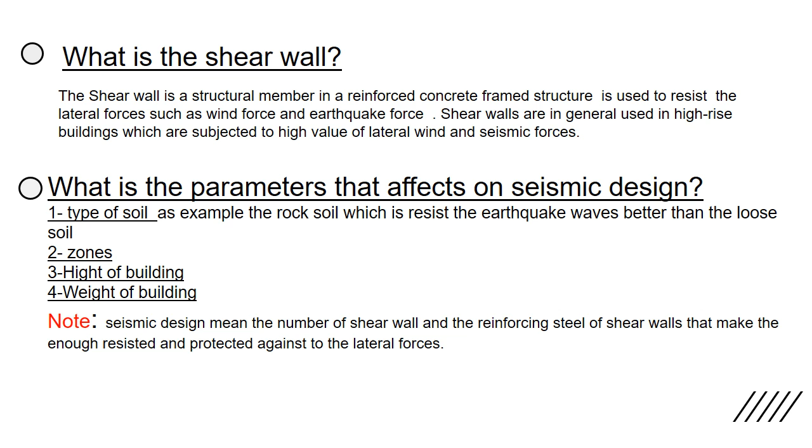The parameters are: 1. Type of soil. 2. Zones. 3. Height of building. 4. Weight of building. Now we want to know what are the steps to design the shear walls.

1. Find the weight of each floor. 2. Find the center of mass and center of rigidity. 3. Find the eccentricity in the x direction and y direction, and the total eccentricity in the x direction and the total eccentricity in the y direction.

4. Calculate the base shear. 5. Calculate the floor forces. 6. Calculate the torsional rigidity. 7. Select the first shear wall that we want to design.

8. Draw the moment and shear diagram for wall forces at the selected wall. 9. Find the temporary area of the selected design wall. 10. Design the boundary element of the selected shear wall. 11. Design the steel of the selected shear wall.

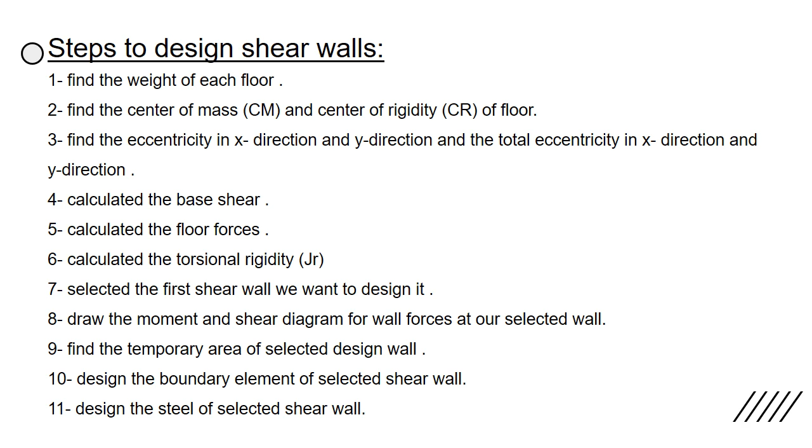Now we want to know how to design the shear walls. In this video I explain how to design the shear wall through a full example. This example contains a building.

This building with 7 floors has 3 shear walls in the y direction and 4 walls in the x direction. I have gamma of concrete equal to 24, dead weight equal to 14, and F prime C equal to 30 megapascal.

I have the 3 shear walls in the y direction shown in blue color and the 4 walls in the x direction shown in green color. I find the distance between the center of each wall and the y-axis, and the center of each wall and the x-axis.

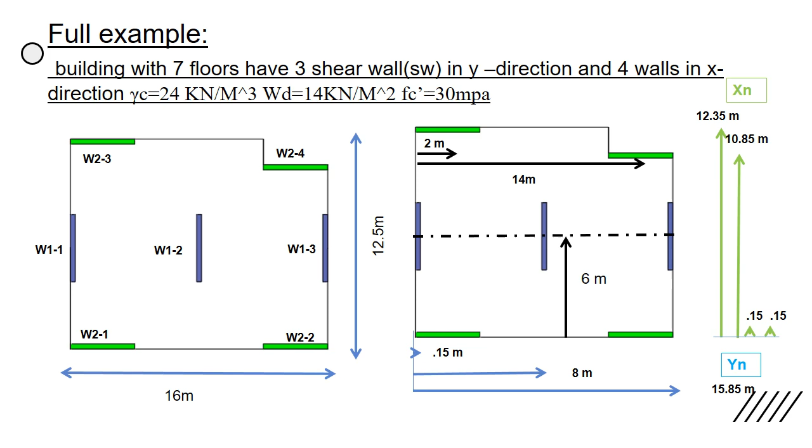Firstly, we will go to step number 1 to find the weight of each floor. In any building there are many elements. To find the weight of each element in this building, such as shear walls, slabs, and columns.

In our example, I have shear walls and slabs. So I will find the weight of shear walls, which equals 7 (the number of shear walls) multiplied by 4 (the height of the shear wall), multiplied by the length of the shear wall which equals 4, multiplied by 0.3 (the thickness of the shear wall), multiplied by the gamma of concrete.

This equals 806.4 kilonewtons. Then we're going to find the weight of our slab. The weight of the slab equals the area of the slab.

In many cases or questions we exclude the opening area, such as the stairwell and skylight. Then we multiply the net area by the dead load of the slab.

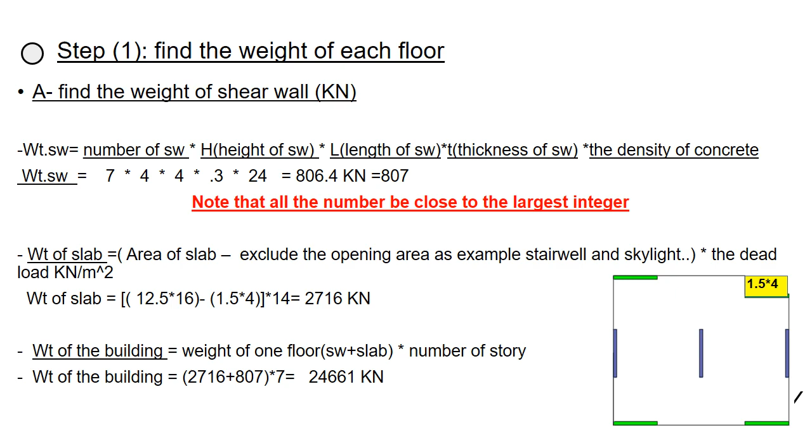Step 2 is to find the center of mass and center of rigidity. This step is very important because the earthquake forces act on the center of mass, then the building rotates around the center of rigidity. So we must be careful when calculating the center of mass coordinates and the center of rigidity coordinates.

To find the center of mass, we use a table. As you see, in each cell we include first the area, then the weight of this area, then we find the center, the distance between the center of this area and the y coordinate.

Then we take the distance from the center of this area to the x coordinate. Then we multiply the weight of this area by xi, and then we multiply the weight of this area by yi.

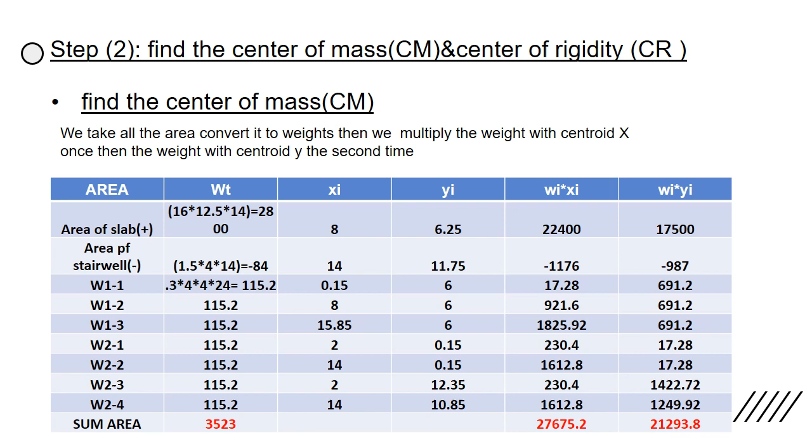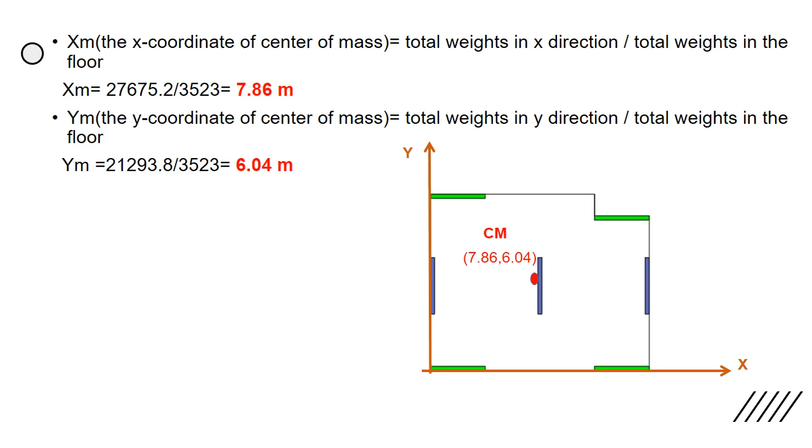We then collect the value wi multiplied by xi, and collect the value in the column wi multiplied by y. Now we find xm, the x coordinate of center of mass, which equals total weight in x direction over total weight of the floor, equal to 7.86. Then we find ym, the y coordinate of center of mass, which equals total weight in y direction over total weight of the floor, equal to 6.04 meter.

Now we want to find the center of rigidity. First we calculate the stiffness of the shear wall by the equation Ke equal 3EI over h cubed, and we explain each symbol in this equation. In the end we find the stiffness of the shear wall, which equals 1103.3. After calculating the stiffness of one wall, which is the same value as the others, we want to find the rigidity coordinate.

We divide the shear walls into two groups. First the x direction walls, which equal W21, W22, W23, W24. We find the stiffness of these shear walls and find yi, which is the distance between the center of the shear walls in the x direction to the x axis, and then multiply stiffness by yi.

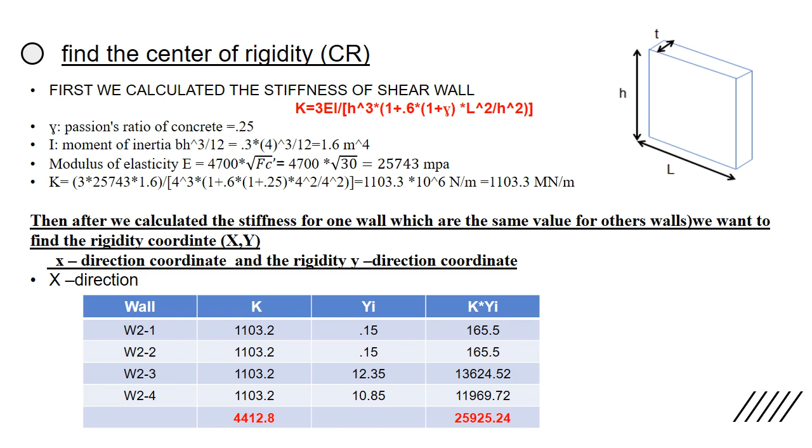We collect the stiffness of all walls, and collect the value in the column k multiplied by y. Now we switch to the other group, which is the shear walls in the y direction.

In the end we find the x coordinate of center of rigidity, equal total k multiplied by xi over total stiffness, equal 8 meter, and the y coordinate of center of rigidity equal total k multiplied by yi over total stiffness, equal 5.88.

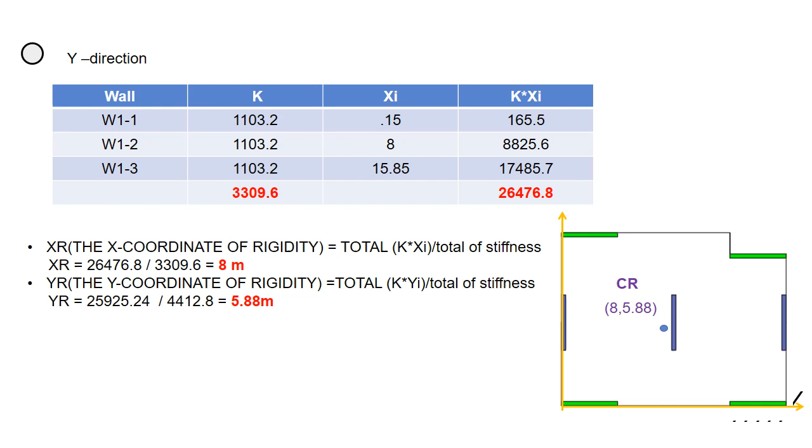Now we go to step 3 to find the eccentricity Ex, Ey, Ex total and Ey total. First, Ex means the difference between the center of mass and center of rigidity in the x direction, and Ey is the difference between them in the y direction. Ex total equals Ex plus or minus 0.05 multiplied by the length in the x direction of the floor.

This term is the minimum eccentricity, so we call it the additional value to Ex. If Ex is negative, then this term 0.05 multiplied by Lx must be negative, because we want the additional value to be the minimum eccentricity.

Ey total equals Ey plus or minus 0.05 multiplied by the length in y direction of the floor. The same case, 0.05 multiplied by Ly is the minimum eccentricity and is the additional value to Ey, so it must have the same sign as the Ey value.

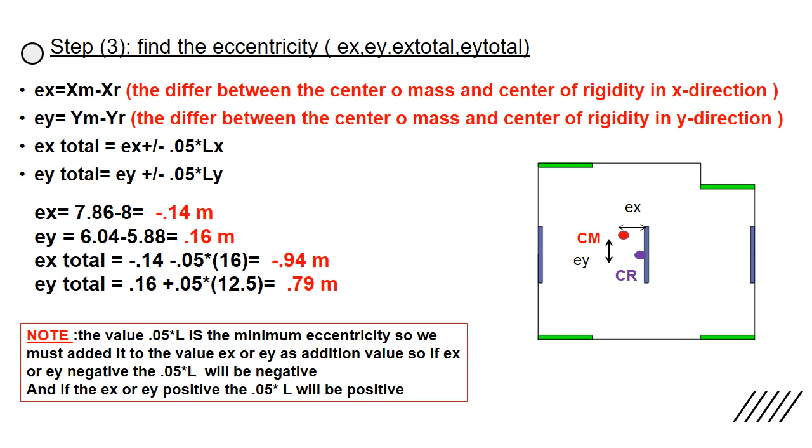Now we calculate Ex equal negative 0.14 meter, Ey equal 0.16 meter, Ex total equal negative 0.94 meter, Ey total equal 0.79 meter. Step 4, calculate the base shear.

First we select the criteria needed to calculate the base shear. We have V max and V minimum, each with a specific equation. If V is larger than V max, then we take V max as the control value. If V is less than V minimum, then we take V minimum as the control value.

I is an important factor. If we have a hospital or school, this is an essential building, and I must save it from collapse through earthquakes, so we make this factor higher, taking it equal to 1.25. But in our example we have a usual building, so we take it equal to 1.

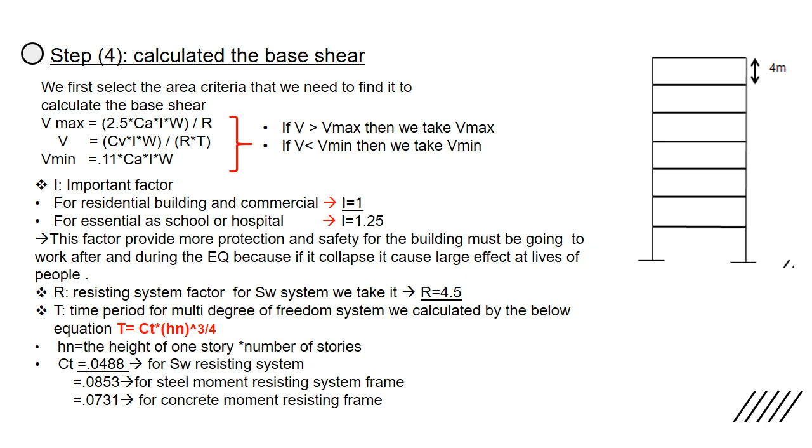We have R, called the resisting system factor. In this example we have a shear wall system, so we take it equal 4.5. Then we have T, called the time period of the multi-degree of freedom system, which we calculate by the red equation, and we explain each symbol in this equation to find the time period.

In the Vmax and Vminimum equations, we have Ca, the acceleration coefficient, and Cv, the velocity coefficient. These coefficients are extracted from tables depending on the type of soil and the zone factor.

These tables are in the codes. For example, if we have this building located in Amman, Jordan, with rock soil, and this area is in zone 2A, we go to table 16I and select zone 2A, then find the zone factor, which is 0.15.

Then we go to table 1 to find the value of CA and CV. We have the zone factor, and the type of soil, which is rock soil, and we find that CA equal 0.15 and CV equal 0.15.

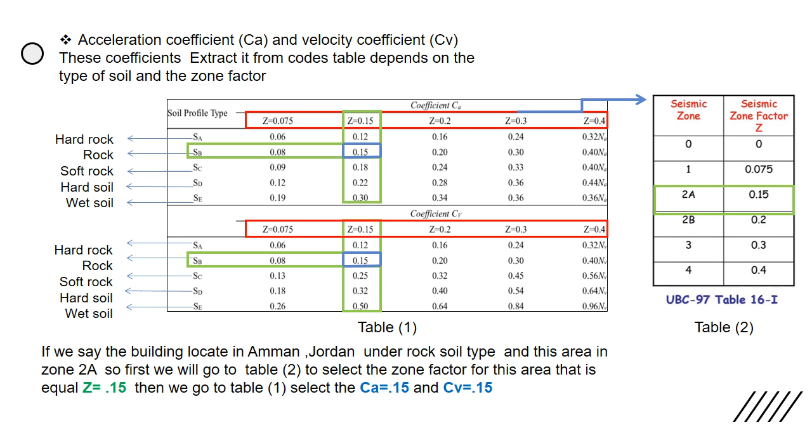From the previous slide, we have importance factor I equal 1, R equal 4.5 for resisting system shear wall system, and CT equal 0.0488, HN equal the height of building, which equals 4 as the clearance distance for each floor multiplied by number of floors equal 28, CA which is the acceleration factor equal 0.15, and CV which is the velocity factor equal 0.15. We find the time period equal 0.594 for multi-degree of freedom.

Then we go to the basic equation V max, that equals 2055 kilonewton, and then calculated V which equals 1384 kilonewton. Then we calculated finally the V minimum, which equals 407 kilonewton. We know that V is located between V minimum and V max, so it's okay. So the V, which is the base shear for the building, equals 1384 kilonewton.

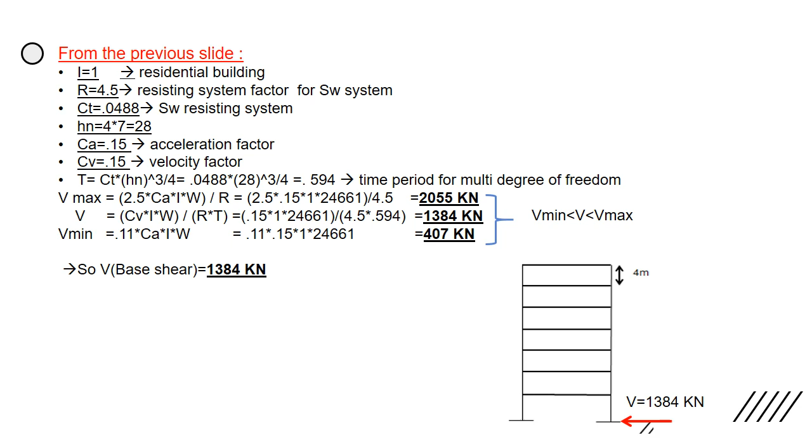To make the subject easier, the earthquake forces affect the building as base shear. This base shear is distributed to the floors, which we have 7 floors, and each wall or each shear wall takes a part of the floor forces. So in each wall we have Q1, Q2, Q3, Q4, Q5, Q6, Q7. Q1 is a part of F1, Q2 is a part of F2. So after we find the shear wall forces, we're going to design the selected shear wall.

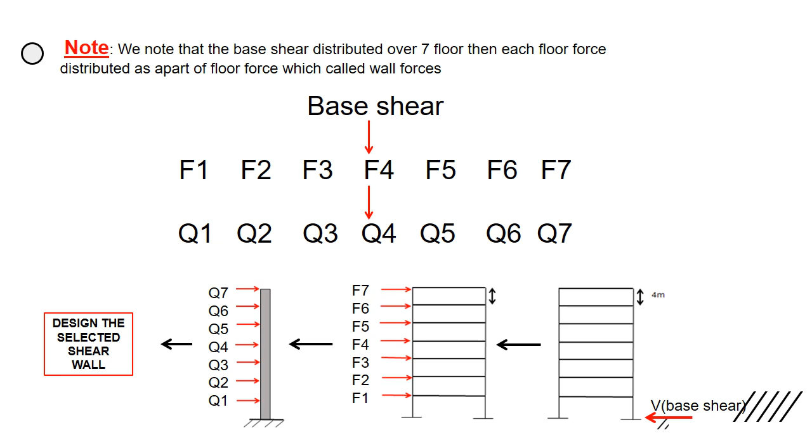Now we want to calculate the floor forces. We have the equation Fx equal Fy equal this long term as you see, Ft equal 0 if Ta is less than 0.7, and Ft equal 0.07 multiplied by Ta multiplied by V if it's larger than 0.7. In this example, Ft equal 0 because the Ta is less than 0.7 second from the previous slide. Now we look in the table and calculate the floor forces.

As you see, in the first floor equal 50 kilonewton, then 99, then 148, then 198, then 247, then 297, then 346.

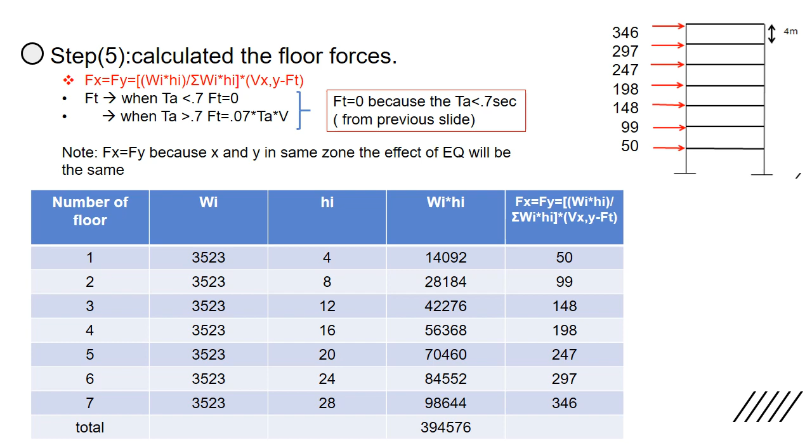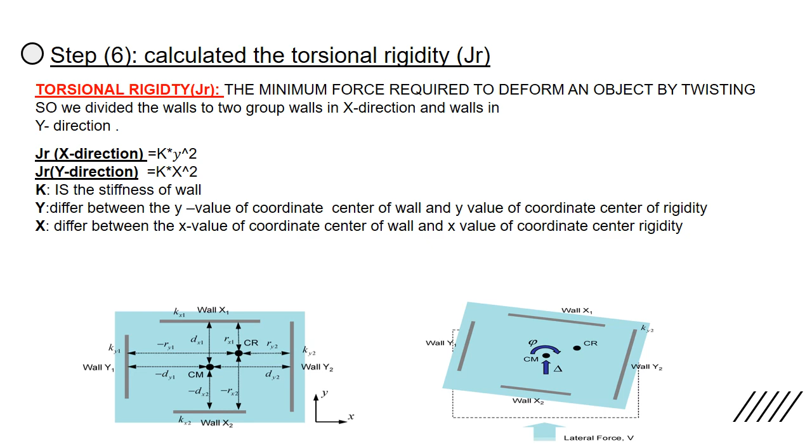Now we're going to step 6 to calculate the torsional rigidity. Torsional rigidity is the minimum force required to deform an object by twisting. So we divide the walls into two groups, walls in X direction and walls in Y direction. The torsional rigidity in X direction equals the stiffness multiplied by y square, and torsional rigidity in Y direction uses the same equation, but we replace y by x. Now K is the stiffness of the wall, and Y is the difference between the Y value of the coordinate center of the wall and the Y value of the coordinate center of rigidity, and X is the difference between the X value of the coordinate center of the wall and X value of the coordinate center of rigidity.

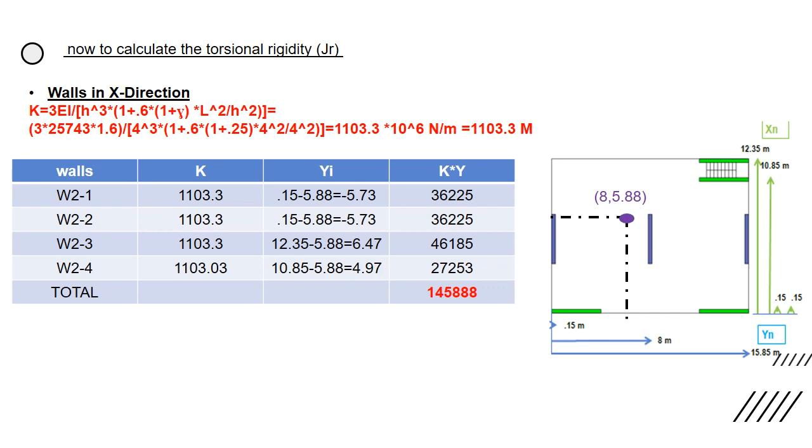Now to calculate the torsional rigidity, first we take the walls in X direction and find the stiffness of the wall, which equals 1103.3. As you see in the table, we find the total of stiffness multiplied with y. Then we take the walls in Y direction and take the total value of K multiplied with y, and in the end the torsional rigidity equals the torsional rigidity of walls in X direction plus the torsional rigidity of walls in Y direction.

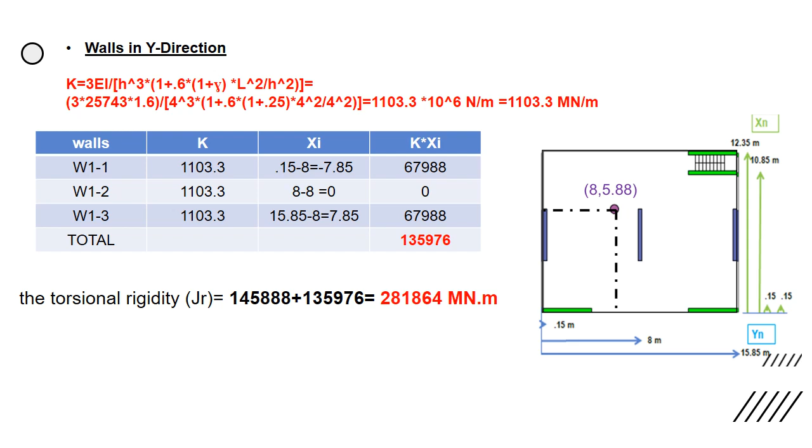I want to stop to talk about the moment of inertia we have in the shear wall: moment of inertia around the y-axis and moment of inertia around the x-axis. I want to talk about which moment of inertia we choose in this equation to find the stiffness. If we take a wall in the x direction, note that Iy, the moment of inertia in the y direction, is larger than Ix, the moment of inertia around the x axis.

So the moment of inertia in the y direction is larger than the moment of inertia around the x axis, because it's easier to understand if we note that the moment of inertia around the y axis means we have to pull out the shear walls from the fixed support, and this is very difficult and needs a large moment. But if we take the moment of inertia around the x-axis, this is core bending for shear walls, and this doesn't need a large value of moment. So when we have x direction walls, we select the moment of inertia in y direction because it's larger than the moment of inertia in x direction.

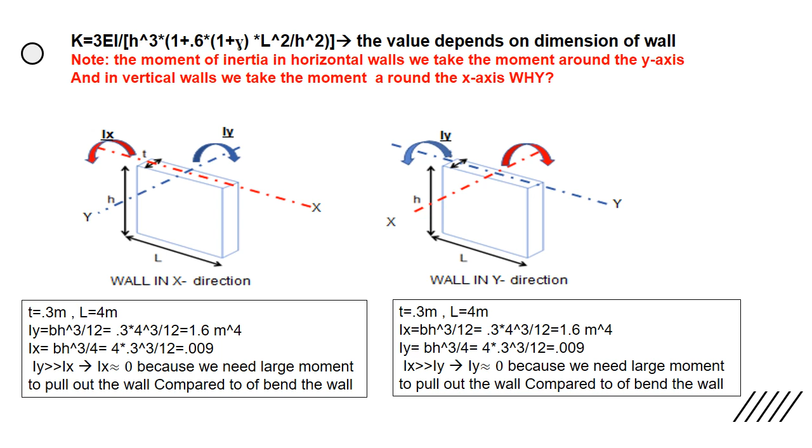In the wall in y direction, it's Ix, the moment of inertia around the x-axis, that is larger than the moment of inertia in the y-axis, and the same reason: it's easier to bend but difficult to pull out the shear walls from their support.

Step number 7, I want to select a wall to design. I select W21 to design it. In the second step, I want to find the wall forces on this wall.

So I have two equations, QXI and QYI. I use QXI when I have a horizontal wall for design, and QYI for vertical walls for design. I have in my case a horizontal wall W21, so I will go to the first equation.

QXI has two terms. In some cases I will add the second term, and in other cases I will subtract the second term. So when can I subtract and when can I add it?

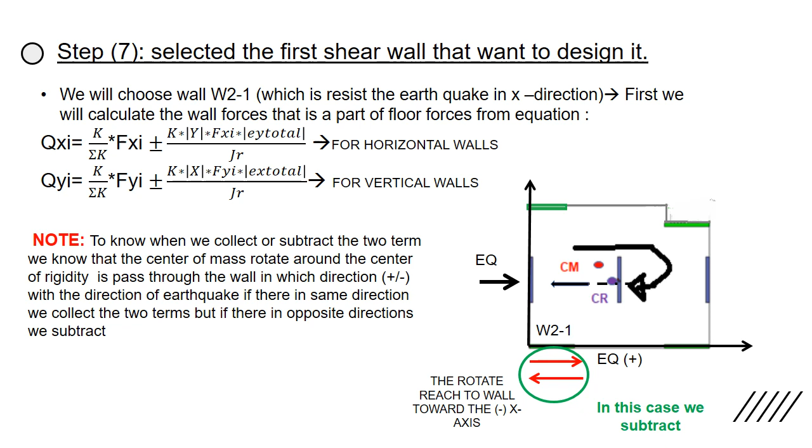If I have an earthquake in the positive x direction, which affects the center of mass, the center of mass makes a rotation around the center of rigidity. If the earthquake is in the positive direction, the rotation through the horizontal wall W21 will be in the negative x direction. So the two directions are opposite, and in this case we will subtract.

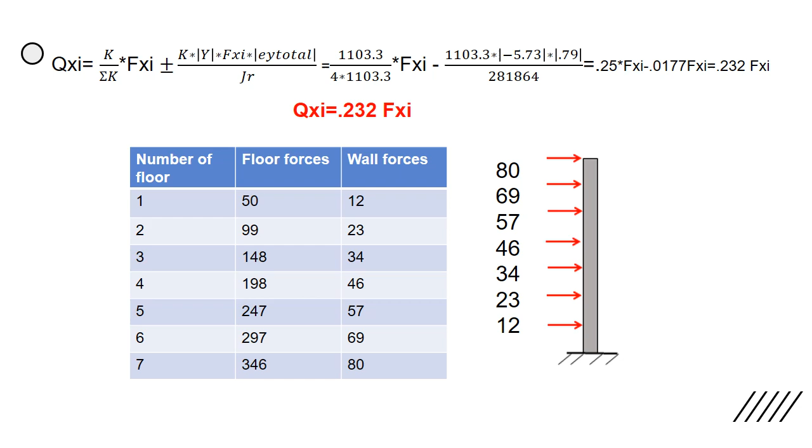Now after we put the values in the equation, we find that QXI equals 0.232 FXI, which means that the wall force is a part of the floor forces, which we then use to design this shear wall.

Now we're going to step number 8: draw the moment diagram and shear diagram for our selected wall. We have the wall forces for our selected shear wall. From the wall forces we can draw the shear wall diagram, starting from the top of the wall, then adding the wall forces until we reach the base of the building, which equals 321 kilonewton. Then we draw the moment diagram, which equals the wall forces multiplied by the distance.

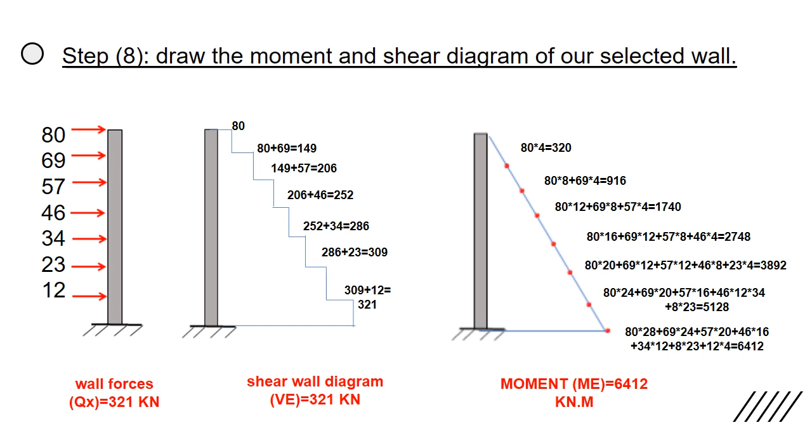Step number 9: find the temporary area of the selected design wall. First, what is the temporary area? The temporary area is the area that the shear wall carries in addition to its self weight. So how do we calculate the temporary area? We take the distance from the edge of the selected shear wall to the edge of the next shear wall, in both x and y directions.

As shown in the picture, D2 is the distance from the edge of the selected shear wall W21 to the edge of shear wall W3. We take half of this distance and add to it half of the length of the selected shear wall, which equals 8.

Then in the y direction we take D1, which is equal to the distance from the x-axis to the edge of the next shear wall in the y direction. This distance equals 4, so we take half of 4. So the temporary area will equal 2 multiplied by 8, which equals 16.

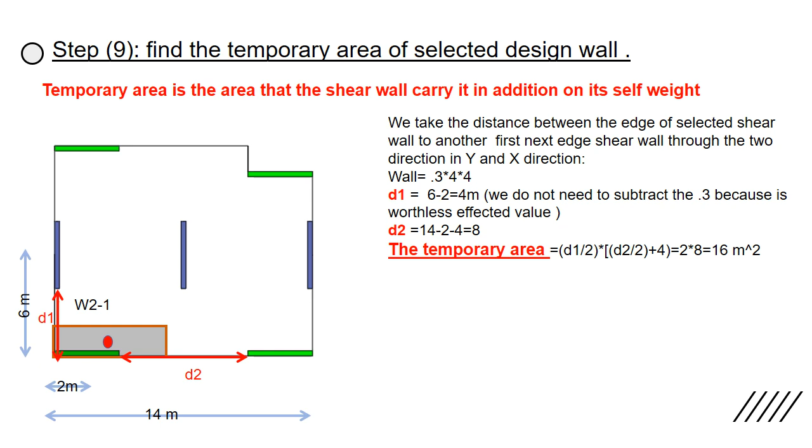Now after we find the temporary area, which is 16 square meters, we want to calculate the load from the slabs. We have axial live load, dead load, and self weight. Then we calculate the dead moment, the moment due to dead load, which equals the dead load multiplied by EX, the distance from the centroid of the y-axis of the temporary area to the centroid of the y-axis of the shear wall, because the y-axis is the resisting axis in our horizontal wall. Then we find the moment due to live load, which equals the live load multiplied by EX, the same distance from centroid y-axis of temporary area to centroid y-axis of shear wall, because as we said before, the moment of inertia around the y-axis is larger than the moment of inertia around the x-axis.

Then we find the ultimate axial load using the combination equation, and we find the ultimate shear force and ultimate moment. In the end, the ultimate axial load equals 308, the ultimate shear force equals 321, and the ultimate moment equals 10,390.

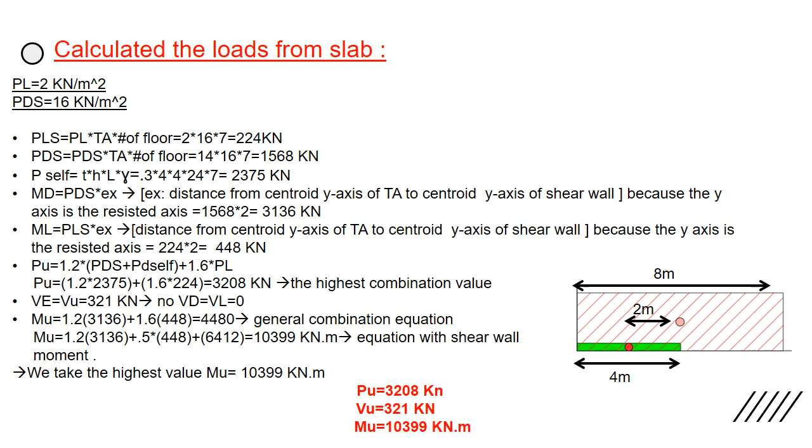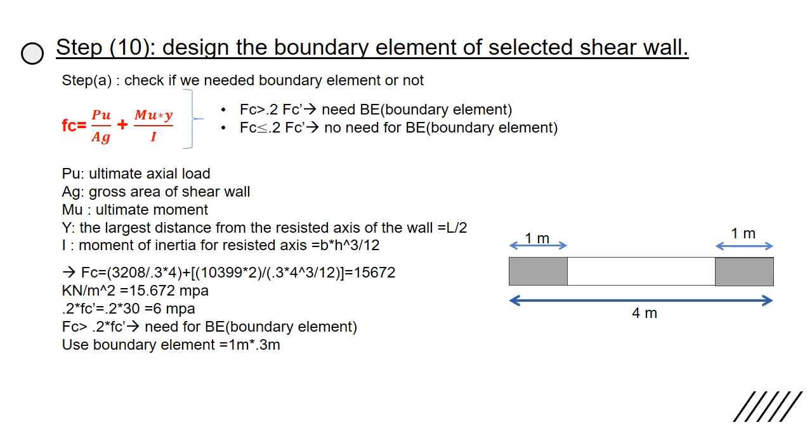Now we're going to step B to calculate the reinforced ratio. We assume first the length of the boundary element equal 1 meter. We first find the force T equal 0.5 multiplied by FC multiplied with L over 2 multiplied with the thickness of the wall. Then we find the area of steel from the next equation.

Then we find the steel ratio in the next equation, which must be between 0.01 as a minimum value and 0.04 as the maximum value. Now we put the value in this equation and find the rho of steel equal 0.039, and this value is high because it's nearest of 0.04, so we must enlarge the length of boundary element from 1 meter to 1.2 meter.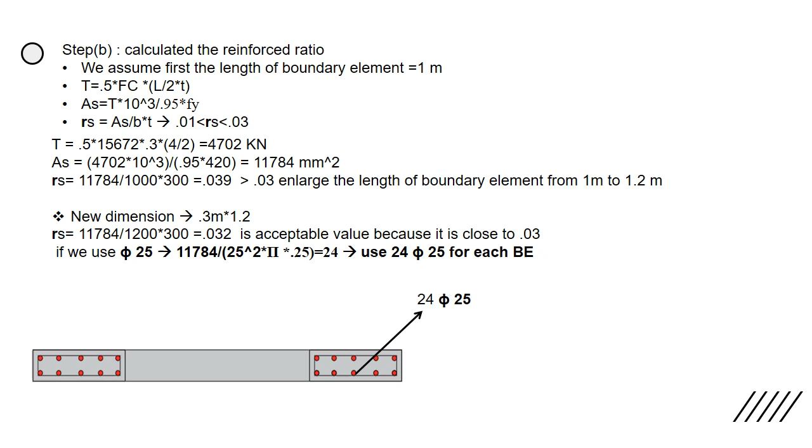Now to find the rho of steel after we change the dimension, we find rho equal 0.032, which is acceptable because it is close to 0.03. So if we try 25 bar diameter, diameter of bar 25 millimeter, we find that we must use 24 phi 25 millimeter for each boundary element.

Now we're going to step C, ties reinforcing and spacing. If the phi of bar is less than 32 millimeter, we use phi 10. If our phi bar is larger than 32 millimeter, we will use phi 12 millimeter as ties.

To select the spacing of our ties, we have three equations. We put the values in each equation, then select the minimum value to be the control value. In our case, we have phi 25 millimeter, so the ties will use phi 10 millimeter, and after we put the values we find 75 millimeter from the first equation is the control value. So in the end, the ties reinforcing will be phi 10 millimeter at 75 millimeter center to center spacing.

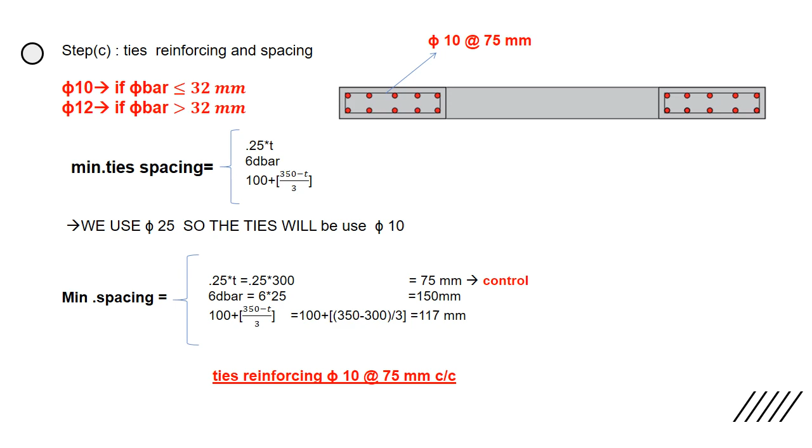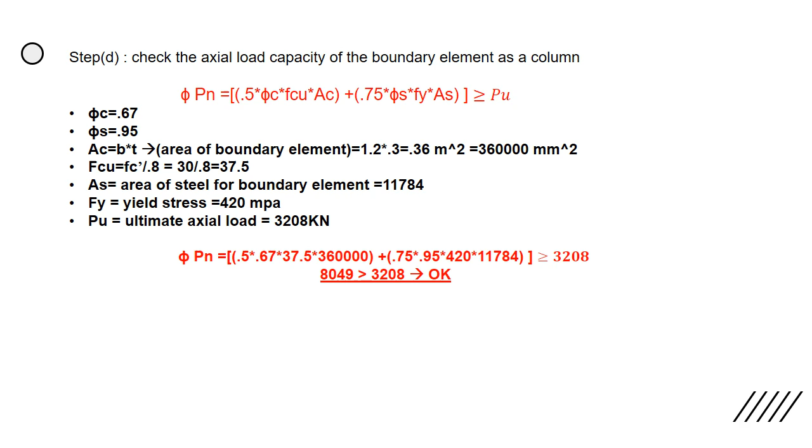Now step D, check the axial load capacity of the boundary element as we did in the columns. We have phi Pn must be larger than the ultimate axial load that we found in the previous slide. As a sample, I explain it under the equation, and after we put the values we find that phi Pn is larger than P ultimate, and that's okay. Now we're going to step number 11.

We're going to design the steel of our selected shear wall. First, step A, we must decide if our selected shear wall needs to be designed or can use a minimum reinforcing steel ratio. From the equation shown, we can decide whether our selected shear wall needs to be designed or not.

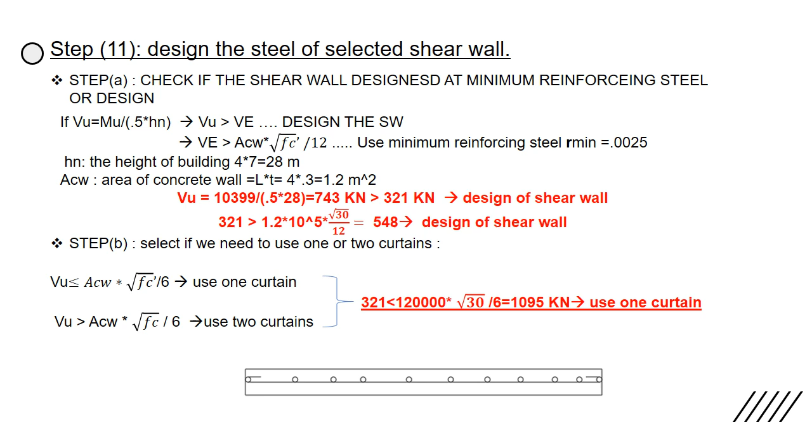We have V ultimate equal, from the previous slide, 321, which is larger than the specification of the code, so our specification tells us to design the wall. So we're going to step B to select if we need to use one or two curtains. In our case, the specification code tells us to use one curtain.

Okay, we're going now to step C to find the vertical steel of the shear wall. We select it depending on the minimum steel ratio, which depends on the equation, whether we have one curtain or two curtains.

If we have one curtain, we use the first equation. If we have two curtains, we just divide it by 2, so rho minimum equal 0.0025, and B we use 1 meter for design, and thickness of wall equal 0.3.

Then we find the spacing of this bar by the equation shown. So in the end, we find the area of steel and select the diameter of bar we need, and select the minimum spacing, and in the end we used 12 millimeter at 150 millimeter center to center as spacing.

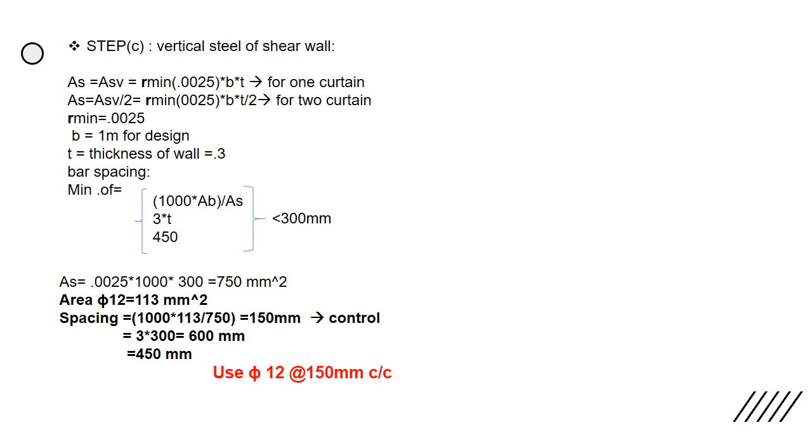Now step D, we will select the horizontal steel of the shear wall. We have this equation from code, and this equation must be larger than rho minimum, which equals 0.0025. As a sample, I will explain it under the equation.

So we put the value in this equation, and the unknown is just the rho of horizontal steel. After we find the rho of horizontal steel, we find it is less than rho minimum, so we use rho minimum for the horizontal steel.

So we use a 12 millimeter diameter, and select the spacing as for the vertical steel, and in the end we use 12 millimeter at 150 millimeter center to center as spacing.

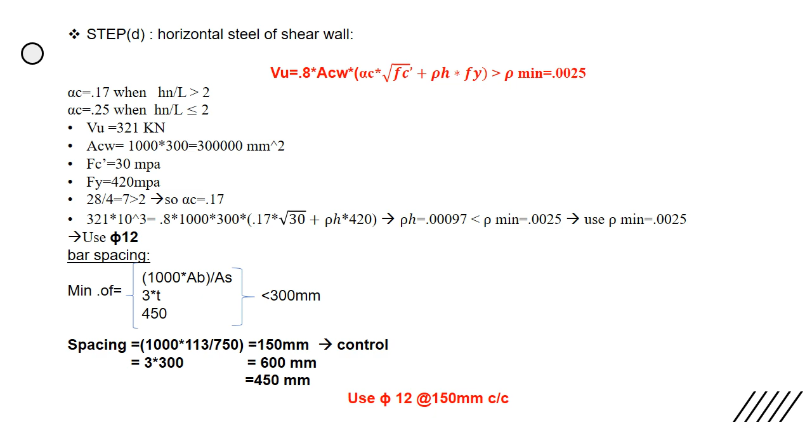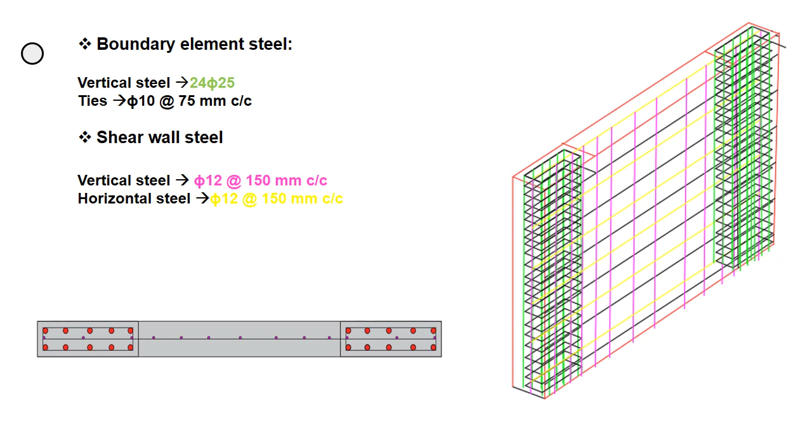And in the end we have reinforcing the boundary element as vertical steel phi 25 millimeter diameter, and use ties phi 10 at 75 millimeter center to center spacing, and reinforcing the shear wall with vertical steel phi 12 millimeter diameter at 150 millimeter center to center spacing, and horizontal steel phi 12 millimeter at 150 millimeter center to center spacing. And thank you for watching.